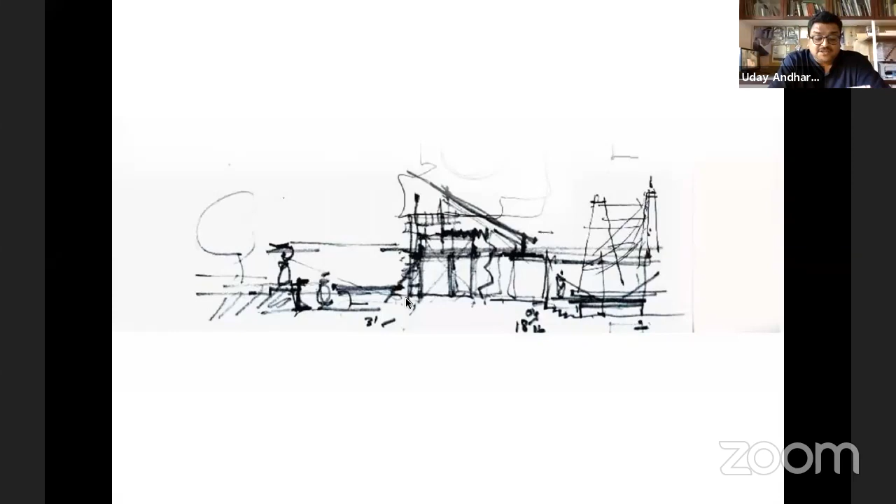What we have seen and admired about their work was the quality of non-performance, whether it was teaching or building. We were influenced deeply by their reticent, silent works that happened around us and spoke of processes and struggles and small, sure achievements as well as their failures. For us, it was a honing, not merely intellectual, but embodied the phenomenological aspects of architecture anchored in its sensorial dimension. It dawned on us early that there is a difference between sense, vision, and image.

Rigor of thought was always paired with the process of acting upon an idea. It was not important as much to arrive at a solution at the outset, but the journey which defined the imminent outcome. The lag between process and outcome was cherished. The outcome celebrated, while at the same time relegated to a work in progress, a never ending continuum.

Academic interactions through evolving teaching methods over the years and the influence of students and peers continue to contribute to thought. I deeply admire the work of fellow architects and engineers today who passionately engage with new alternatives using earth, innovative masonry techniques, use of bamboo, and even efficient systems that explore the potential of steel, developing an amazing body of shared open knowledge.

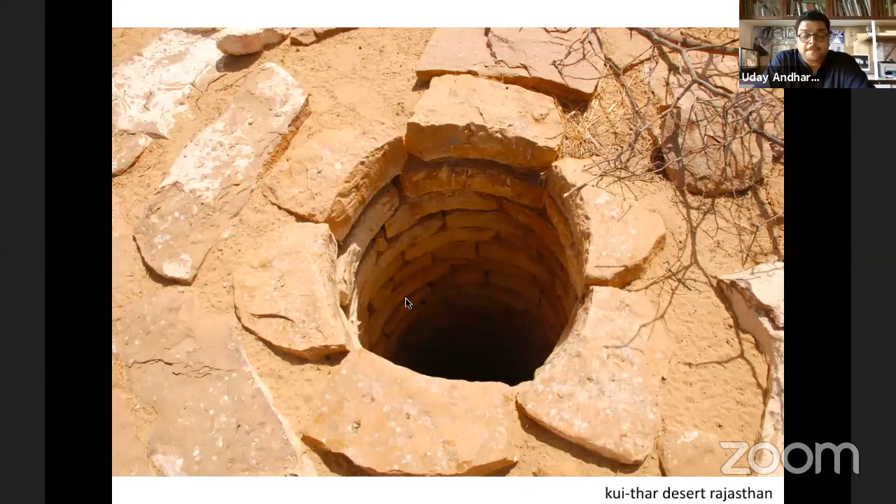A deeper knowledge of water and its structures could not be understood without the understanding of context, society, materiality, and the craft of building. The idea of conservation of water through its ingenious methods seen in kunds, baolis, cisterns, and wells was essential. Our interest in the study of stone and lime in construction exposed us to live practices of using lime in contemporary construction for its incredible resilience, affordability, and thermal comfort.

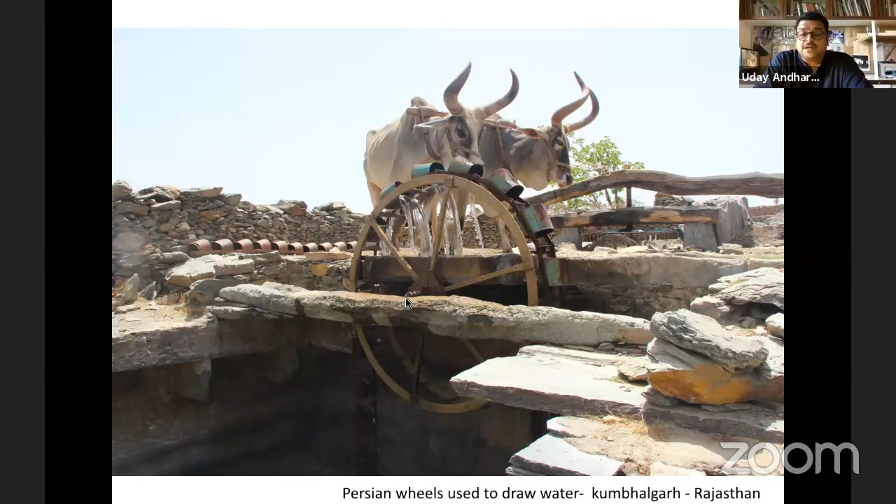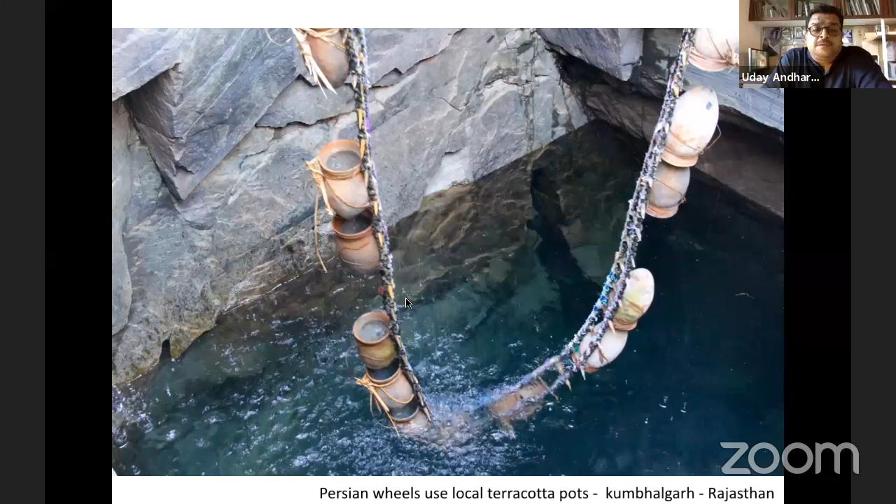What I've been showing you in a series are examples from the Thar Desert, examples of wells that have remained perennial in conditions which have been very harsh and with great scarcity of water, which help us orient our understanding to some of the deeper practices that are prevalent and what they mean today.

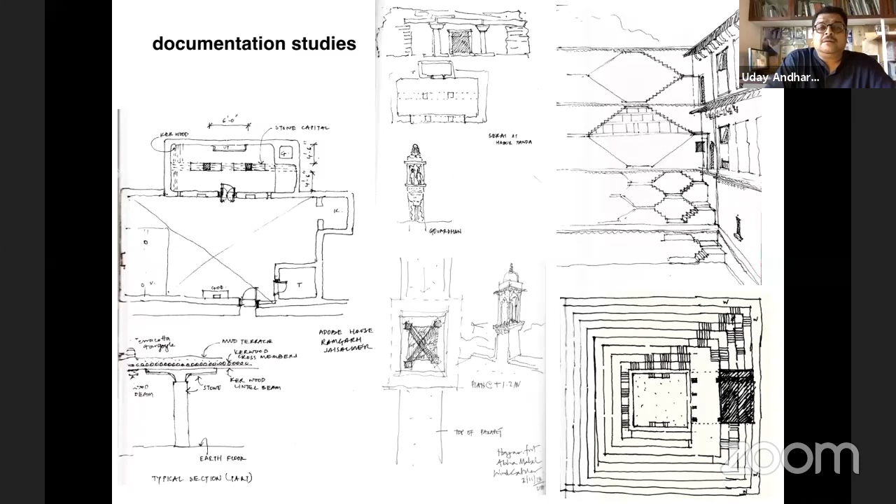A lot of our work has also been through travels and understanding and documenting the things that we see through sketches and through some of the mechanisms by which these things become possible. Of course, looking at architecture by drawing is a very, very important tool, which a lot of the previous speakers on this forum have emphasized, and I cannot stress the importance of that further.

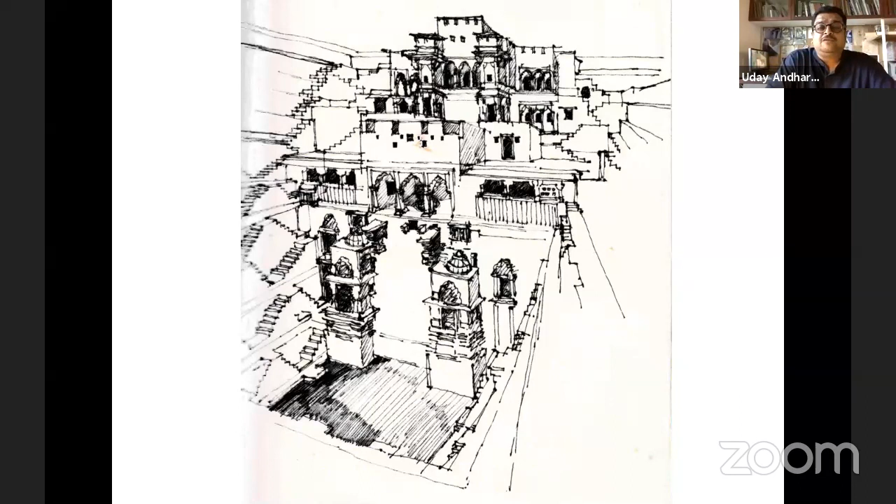The discovery of new forms that connect with water and are related to water and become water-centric in their making is a very, very important lesson for us as architects. Of course, there are known examples of formal architecture connected with water and their integration into the urban fabric as we see today, which is also extremely important.

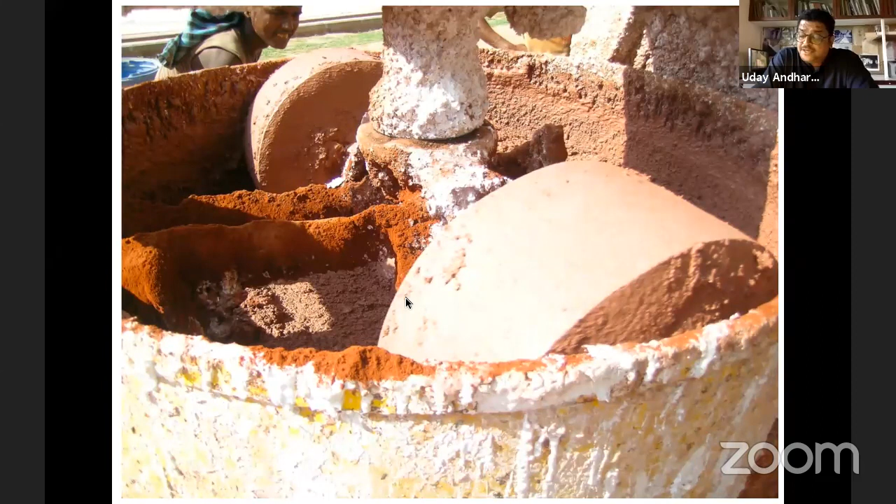Its breathability makes it a living membrane that connects the structure with the natural order of exchange, enhancing the quality of the environment within, self-healing the surface, and ensuring durability. Its forgiving nature during construction is a virtue that affords time to be creative.

Small privately owned lime quarries and kilns that have survived the onslaught of cement companies continue to provide an alternative to the locals over cement. The practices of hot lime mortar and plaster being used today are an absolute delight, and we have been able to tap into these resources directly to support the use of lime that we do in cities.

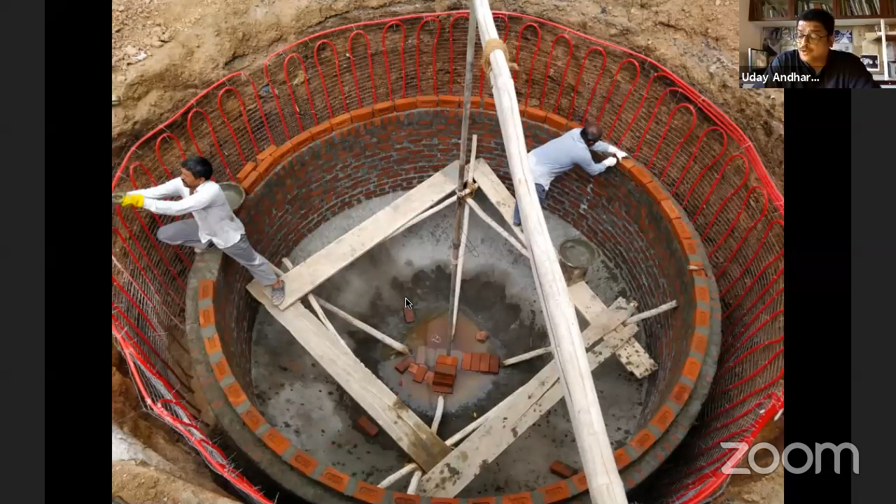Recycled surkhi and lime bricks coupled with hot lime mortars and plasters have proved to be an excellent combination for load-bearing and confined masonry systems that we deploy at various scales of building. Skilled craftspersons are employed on projects to train teams of local masons who have never worked with lime before, to a great success. A big part of our role has also been to facilitate this exchange, marrying appropriate materials and construction techniques with the available practices around us.

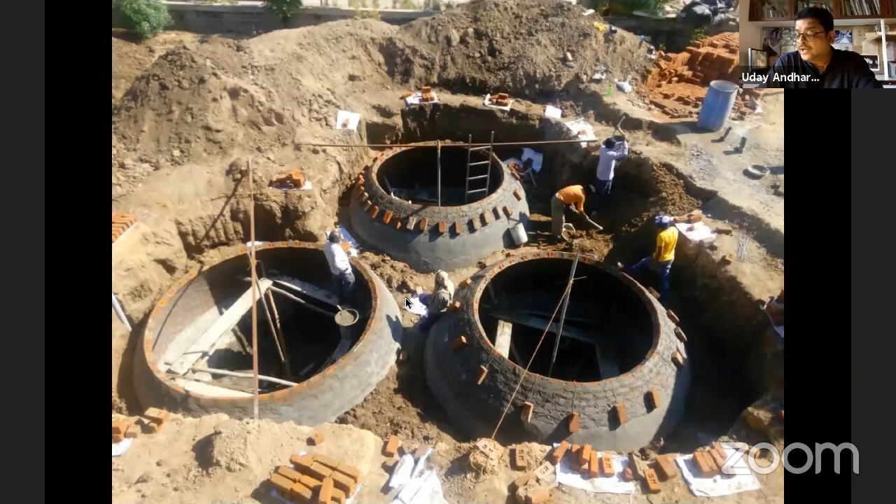Vernacular traditions embed best practices to use minimal resources to build. We have learned from local plaster masons and well makers like Kalubai Sosa from Lok Mitra Sanstha in Saurashtra and Jayantibai Prajapati in Ahmedabad, who build very economical cylindrical masonry tanks for local farmers. These methods have been mainstreamed into our work with critical engineering inputs from us to develop a model for structure cooling and rainwater consumption simultaneously.

These are some of the examples from the projects that we've completed, where a team of masons comes along with 2 or 3 helpers, and we engage our team of masons to transfer that knowledge, with an intent that this knowledge will grow and become accessible to everybody. The whole challenge and the deterrent against people building harvesting tanks is the cost per liter, which was set up by the plastic tank, Sintex and other companies, plastic tanks being priced by the liter and affecting the whole market about the cost. But these are very economical to build.

And of the 4 examples you see on the screen, the first one, in Suramya House, is the one we built in our own home. The second one is in Adipur House, which uses the idea of radiant cooling and creating the tank as a thermal mass. The one on the right is the Natarani Amphitheater stage, which actually holds a 1 lakh liter tank below its performance stage.

And the one in the center is a very complex structure that we are working on currently for an Upashraya, which uses a stored system 2 levels below the basement and an access draw well, and the entire structure is built out of hydraulic lime and brick. This is a project which is still being worked upon, but these are detailed drawings that were made to understand what we try to achieve.

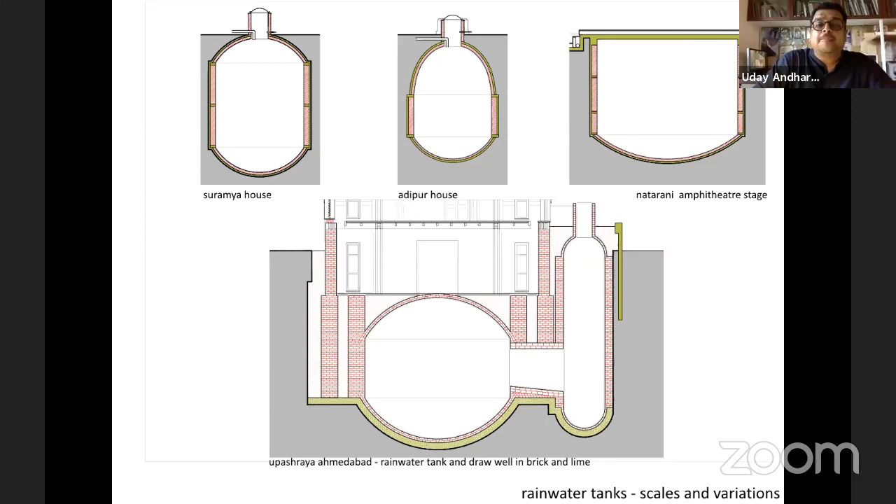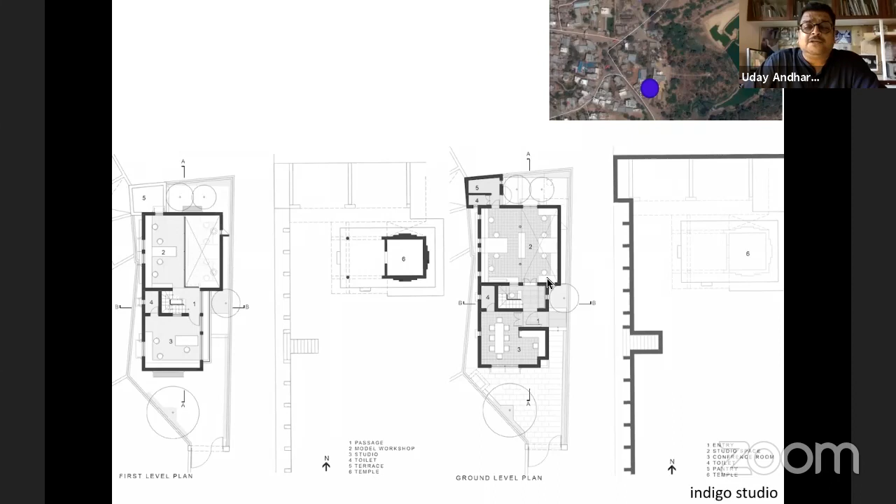The everyday is important to us. This is the photograph, this is the plan of our studio. That's the lower level and this is the upper level. And we sit right on the edge of Shilaj Lake. This was built in 2010 and it engages our building and its sense with the temple plinth, and creates an introverted environment, which actually ended up being our lab along with our home.

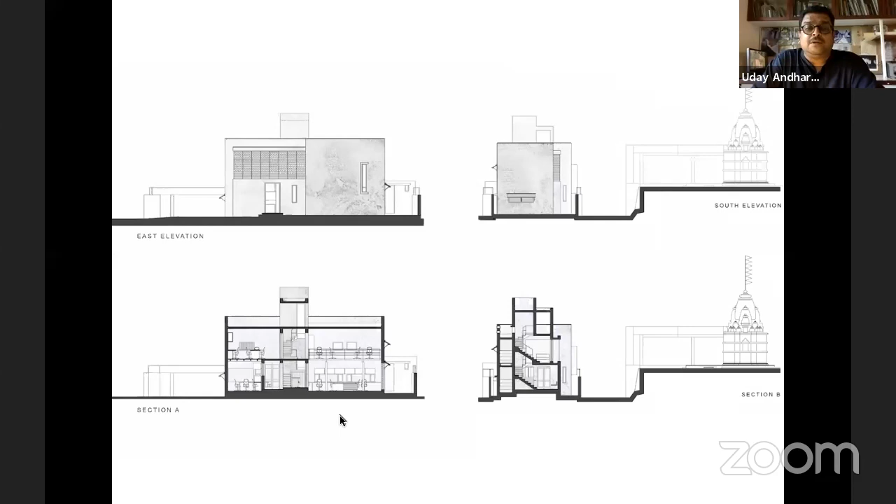Our home was built on the outskirts of Western Ahmedabad soon after the earthquake in 2001. This is also an important lab for us. So in this plan, we have an L-shaped plot of land, and there is a dwelling here and another part here. This is the part which we built first, where our parents moved, and then this part was built later, and then there is a beautiful connection that happens across the court between the two units.

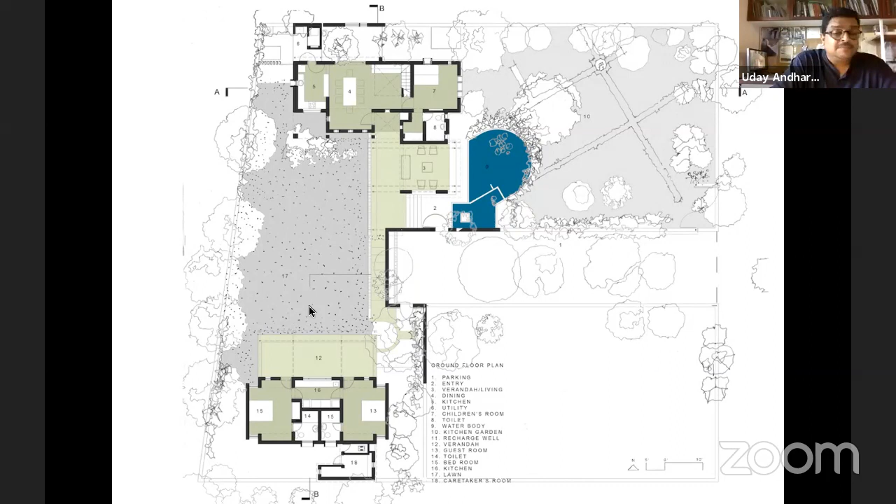Like I said earlier, the everyday is important. And experiments in structure cooling, use for rainwater, layered screening, and natural shading strategies, along with the use of lime in construction for the first time, happened at our studio. Upcycled furniture and everything that is salvaged was incorporated in both our home and studio. These are some of the sections that explain to you the nature of the built form and its relationship with the landscape.

The garden where we grow our food, make compost, harvest rainwater to drink, conserve and recycle the seeds we save and share, and the food we cook, virtually living outdoors, forms the core of many lived experiences. Edible screens, vegetable, and other vines are used to shade and transform space in summer to increase its usability.

These are the things we grow within our purview of everyday life, spending almost an hour and a little more every day to ensure that there is a certain amount of food that is grown to offset the stuff that we need to buy from outside. We've worked with various strategies to elegantly bring water down from the roof so that it can be harvested. And there is a certain joy in the assemblage of things. We try to assemble these things together. They may be clumsy contraptions sometimes, but they get refined over time.

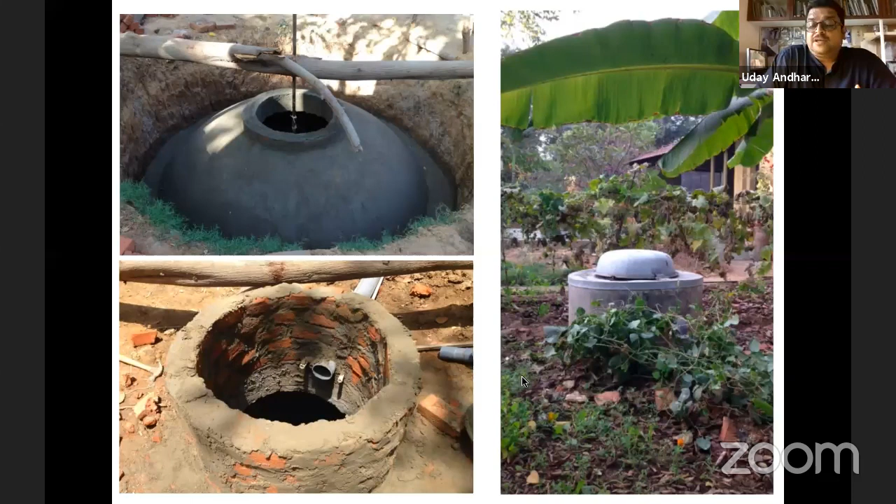And this is another tank we built. The first one we built below ground, the cylinder which I had shown, and how it gets integrated within the garden. The earth over the tank actually becomes the great insulator, keeping the water temperature inside the tank to a very comfortable 27 degrees. You allow nature to take over the building. You allow plants that will give you food to engage and come into your life so that their existence and yours becomes one and a very merged experience.

And there is a lot of learning in the way we see this. We have grown various kinds of vegetables and creepers and pumpkins and brinjals and other things together with rose vines. And we've discovered that they work with a certain synergy and take care of each other. And I think that's a very beautiful way to look at domestic landscape, in a way that it becomes integrated and synergistic with what our needs are and defines the interdependencies that we have with these systems.

We also have experienced heat from the roof, and these are experiments where we buy hay from the local fields, tell them to store it on our roof, and eventually, when the summer is almost coming to an end, we give this back to the person from whom this was taken, and by monsoon, the roof is clean, washed, and ready to harvest water. So this gives us a very interesting connect with the local agrarian cycles.

So every time there is a crop outside that's harvested, we get the hay. The hay comes to our roof. We keep it there for 3 to 4 months, and then afterwards it goes away. So it kind of reinforces our belief that if we can afford to connect ourselves with what is around, then I think that can be very enriching.

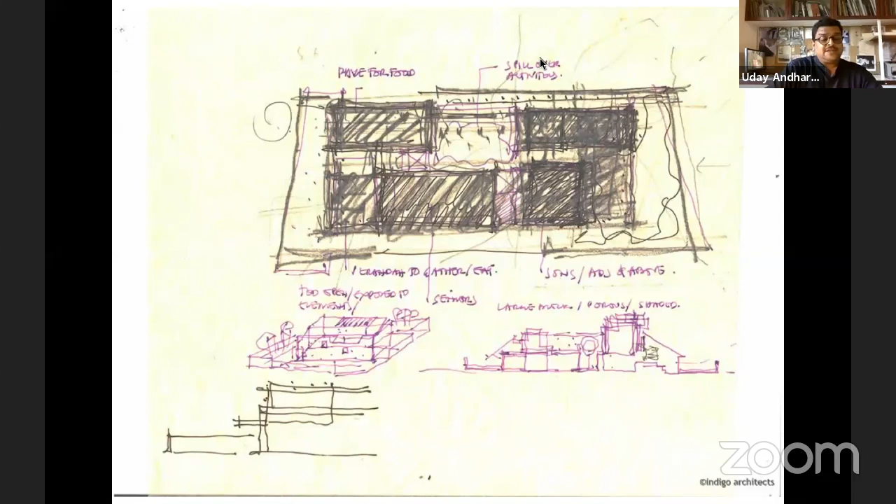We generally design around 5 aspects: the client and programmatic needs, the site, available resources of material, water, thermal comfort, and building resilience. Listening keenly to clients builds a rapport to realize the objective in a fair and considered manner, to establish a dialogue with stakeholders, to raise new questions and opportunities to enrich and clarify the program. Participatory, inclusive processes of interaction irrespective of the scale of the project.

This is a plan of a house we completed recently before the lockdown in a city called Adipur near Gandhidham in Kutch. And the family approached us soon after the completion of the LLDC museum in Kutch. They happened to see the museum and experience its environment and the manner in which it was put together, and called us and asked us if the same kinds of systems, principles, materials, and ideas can be integrated in a dwelling with a limited budget.

So we thought it was an interesting idea to engage in a conversation with them. And so we took upon the request to go and meet them. So this house basically started with that as the backdrop. So this is a plan for a family. It's a joint family. They are farmers. They are connected with the dairy business and extremely enthusiastic and aware of what the environmental ramifications are of building in a certain way.

Adipur has seen some really terrible works happening post-earthquake, along with some good ones as well. But there is a certain discordant note that the buildings around there strike, whether it concerns earthquake resilience or climate. There is a lot of money being spent on crazy finishes because Kandla port is actually the conduit for exports, and a lot of people are aware of what the West is using, and they grab all the things that are going out of the country as being appropriate and begin using those in the houses around. So they attempt to sort of make a house in line.

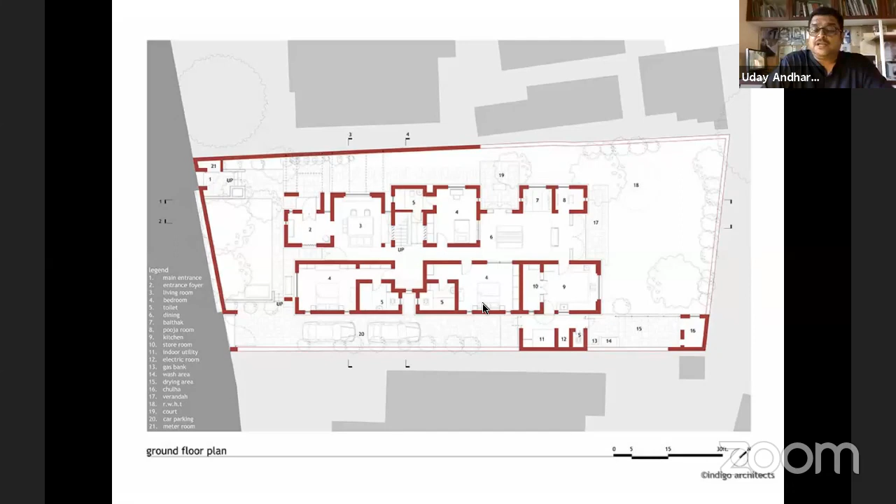The clients wanted a house in line, and so we agreed and we engaged in this fantastic dialogue with them to realize the plan. And this was the nature of engagement that happened almost on a fortnightly basis. The entire family was involved in the discussions, the plan, their own requirements, and we found a very interesting voice amongst the women of the family who took the lead in determining what is appropriate, what is not, what falls within the range of their daily ambit of work.

And for us, it was a great learning experience to begin to tune into this process and come up with a building which is absolutely dovetailed to every nuanced requirement of the family. So here, what we experienced was a fantastic engagement across.

And then when the project was getting done, there were a lot of inputs that came from them to tweak things, and those were managed within the framework of what we had proposed, looking at the use of lime, surki, bricks, lime mortar, lime plaster, and all the works that go into a normal project that we do.

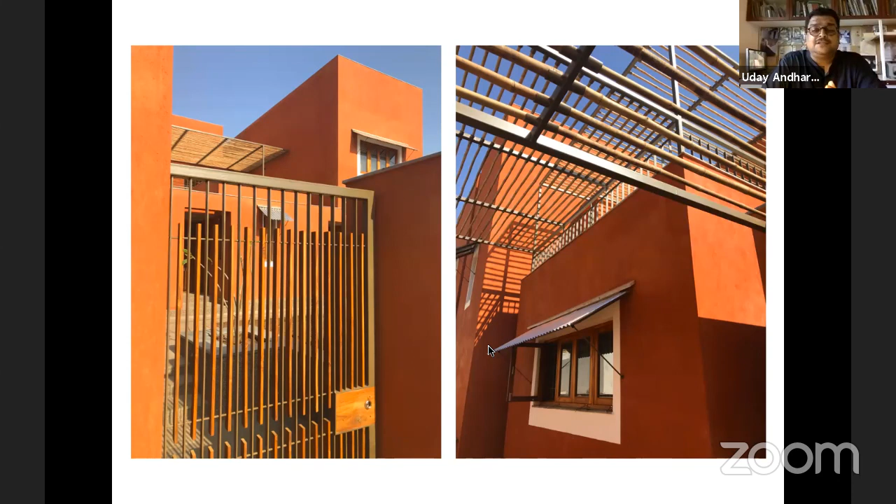What was interesting in this was the manner in which the building sits in the neighborhood. A lot of buildings around are plastered cement structures, and here comes this red brick structure. And during the course of the year that the construction happened, the building also ended up becoming familiar to a lot of people in the neighborhood. And a lot of people would walk in and see and understand what we're doing.

And this building actually embodies every principle of thermal comfort that we know, both in the book and through our experience, whether it is the use of lime, the managing of shared service spaces that create buffers, cross ventilation, thermal draining, rainwater harvesting, using the rainwater to cool the building.

And in this particular building, there was a very interesting process where we engaged with the tank makers from Saurashtra and put them in touch with a company that does radiant cooling. And we detailed out a system where the radiant cooling system and the traditional masons who make the tanks talk to each other. And we engineered a very efficient system for creating thermal comfort.

Post occupancy, we've been there at the opening and then subsequently, and we find that the envisaged spaces are used in the way that they were meant to be. And we go back to our idea of how much light is enough within a building and how dark can spaces be and what is the nature of light that comes in, and cross ventilation and reflectivity using dolomite plasters within the house and how it enhances the sense of comfort within.

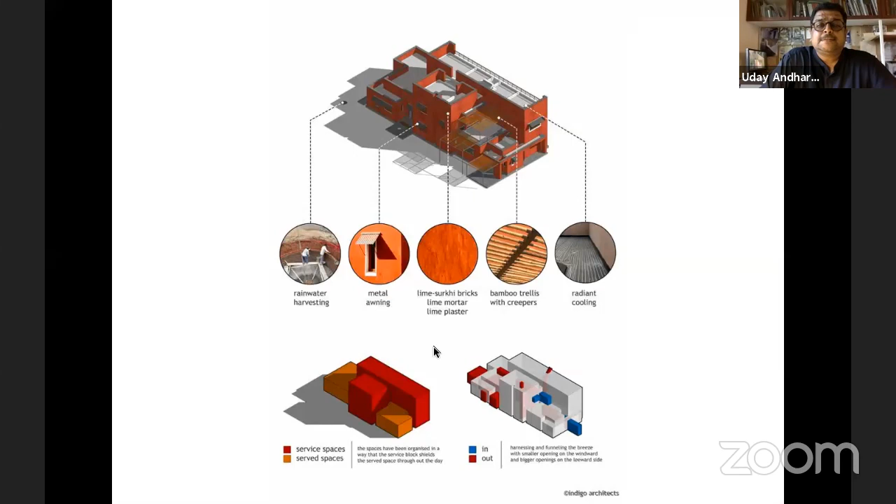So I come back to the physical aspects of building and construction, where we try to keep the building from heating up, so the need to cool the interior is minimized. We use materials that don't heat up and are durable, such as lime in masonry, mortars, and plasters, and devise systems that drain the heat from the roof and other surfaces.

Here, I would like to talk about two things. One, that we've always learned since we were students that it is important to insulate. But insulation is a delay mechanism, and it does not actively rid the building of its heat. So one of the things that we learned from a very senior engineer in India, Surendra Shah, who has worked on several of our projects and guided us, was the need to keep the structure cool. So this has become a very important consideration in the design process.

And these are cornerstones because there is no way we can escape these. And there is no way that we can continue to afford to make buildings the way we do. So given the situation that contemporary practice happens to engage itself in, these systems to us are absolutely essential.

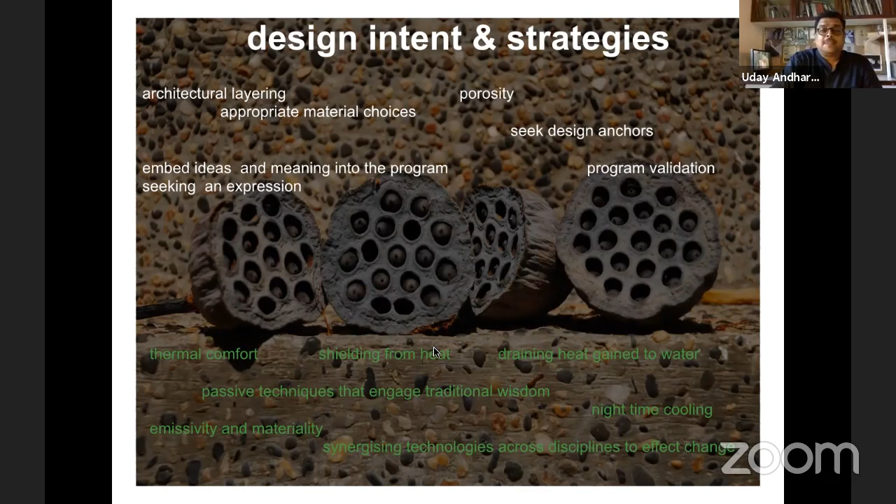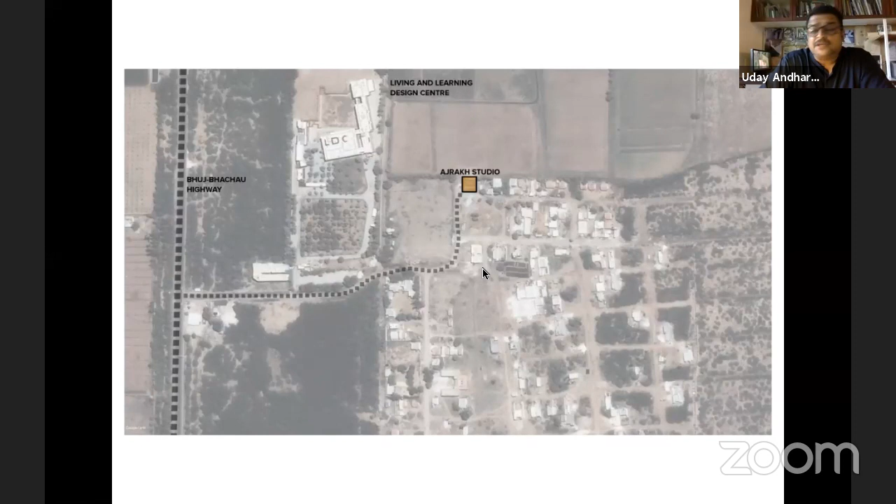I will now share vignettes of three projects, two projects from this point, the Ajrakh Studio and the Natani Theatre, quickly. So the Ajrakh Studio is right next to the LLDC museum. This is Ajrakpur village, which was formed soon after the earthquake. And this site was part of open barren land where the LLDC eventually came about. So after we finished the LLDC project, the master craftsperson Ismail Bhai Khatri, Dr. Ismail Khatri, wanted a small studio space for himself to work on.

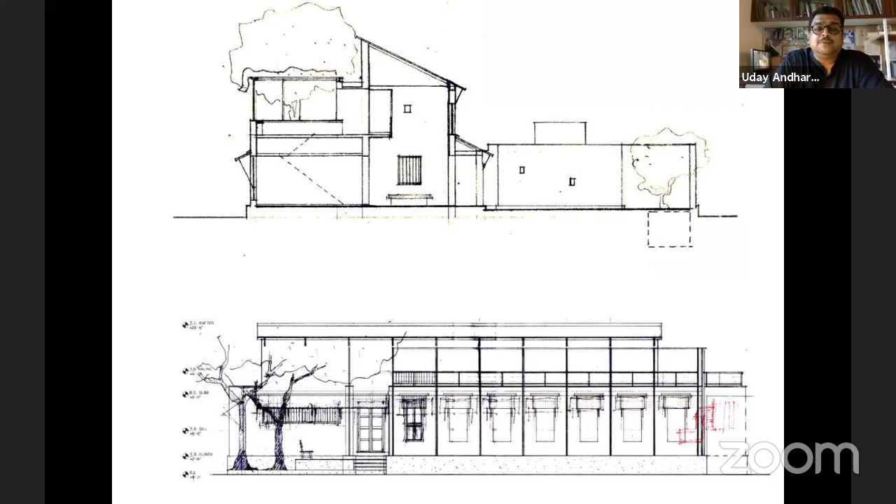And we started working with his program and certain basic ideas of what an insert in this kind of a neighborhood would mean, and what the main master craftsman of the community wishing to have a studio of his own would mean to the rest of the community. So there were these questions that emerged. We had a fantastic dialogue with him. And then there were certain components to his requirement on a corner plot right next to his house.

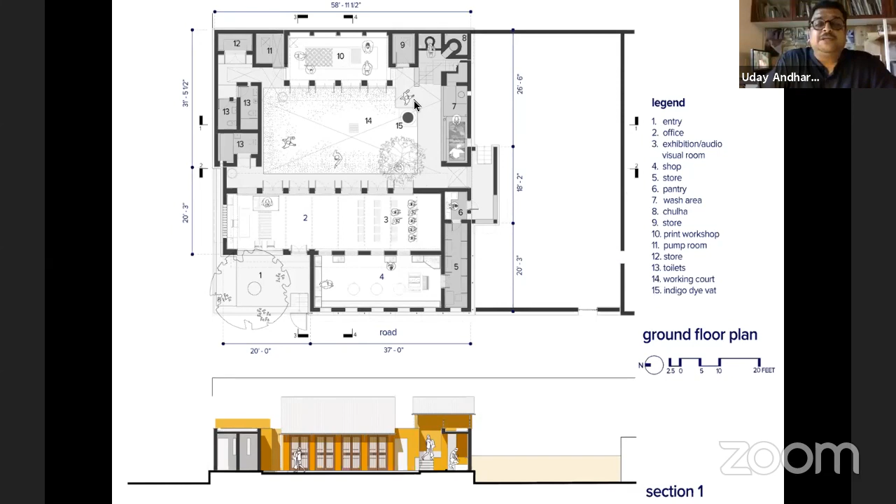So we took this simple requirement and began looking at craft, its spatial configuration, the need for porosity so that there is an exchange between the two volumes and the workspaces. Thermal comfort was essential because we're in Kutch and this is a very, very harsh environment. And in that, of course, our selfish motive of seeking expression and identifying place.

And I think this project also taught us a lot of things where, again, the client desperately wanted us to use the things that happened in LLDC because they had seen the advantages of that. And here, at a very small scale, all the materiality, all the principles that I discussed about the previous project were done here.

In fact, this project was completed 3 years back, and a lot of the clients who gave us the Adipur house to do kept visiting this place over the summer to understand how the structure cooling works, whether the floor is actually cool or not during the summer. And only once they were satisfied did they ask us to move forward. So there was a certain test that this building has also gone through.

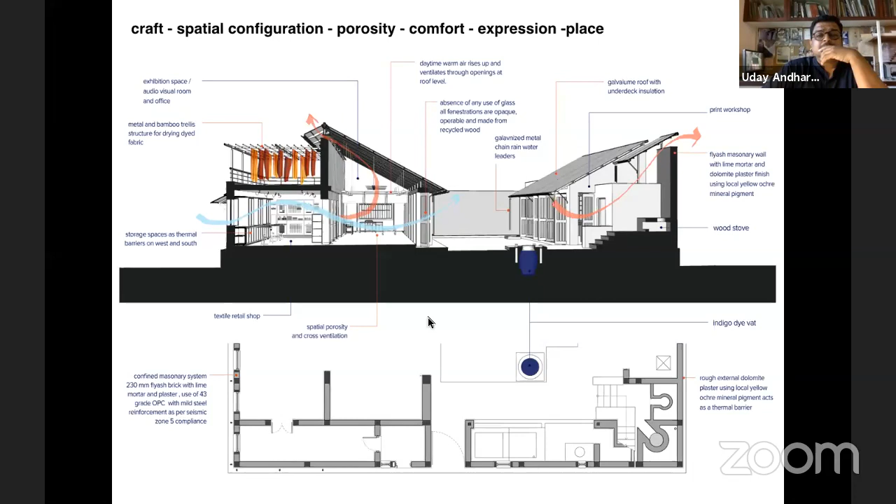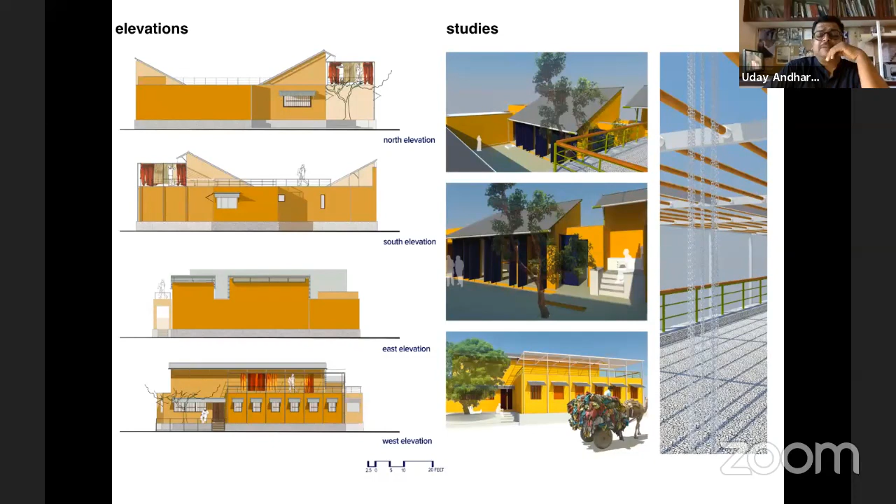So that's one of the completed images taken a few months back, where the manner in which it sits. We are currently working on the extension of this and the residence for Dr. Ismail Khatri in this space, almost preempting that this would eventually happen. So the wall and the gate is in place. The neem tree is in place, and we are going to be working within this area soon.

And this is the sense of the structure after it was completed. It's a small clip which will give you an idea of how the building sits in the context. What you see beyond is his current residence and office. And then there are these barren streets on which there are small tenements that people have built for themselves.

This is the sense of space within the courtyard, where there is an indigo dye vat here. And these are the tanks where they wash, and then there are two tanks here which are meant for rinsing the fabric. And here what you have is the print shop. And this is the chulha where all the material is boiled for the process.

This is the space where he entertains his visitors. There are a lot of people who come from abroad, designers and students from fashion institutes and other places who want to learn the craft. And so this is the place where he engages with them, and the courtyard is the place where they hold workshops. And at the far end is the space where he sits.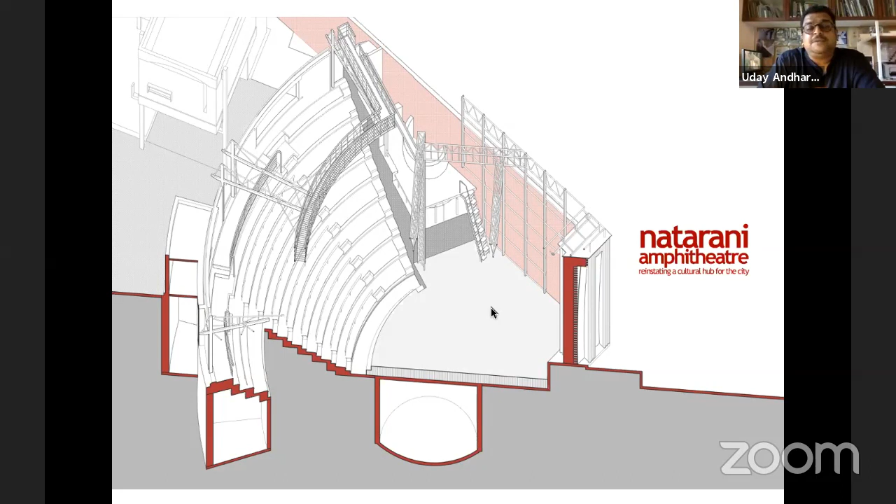The last project which I would talk about today is the Natarani Amphitheatre, which we finished in 2018 and was part of a fantastic journey with engaging with a piece of land laden with history.

So I'm sorry, I'm out of electricity, but it should be okay.

So this site is on the edge of the Sabarmati riverfront. This entire precinct that you see here is the home of the Sarabhai family. This is the building Chidambaram, built by Gira Sarabhai way back. And over here, so this is the family home. And over here is the Darpana Academy for Performing Arts, whose early buildings were built way back in 1963.

The earliest building that was built there was a small library that sat on the edge of the river. And this was initiated by Mrinalini Sarabhai. And the library also worked like a multi-purpose hall where dance could be taught and there were certain resources. In 1966, they purchased a temple and put a temple structure. It's like an old Haveli temple, which came up here.

And later, Achyut Kanvinde, who was involved with the PRL and also very close to Dr. Vikram Sarabhai, was called in to design the Darpana Academy for Performing Arts. And his intervention here straddled the space between Doshi's library and the temple and occupied the space here.

Subsequently, Kirti Shah, architect from Ahmedabad, engaged by Mallika Sarabhai, was asked to develop the amphitheater, which is shown here, which sat along the contour going down to the water. So these were incremental growths that happened over time. And by 1999, the Natarani Cafe came into existence, which defined the edge along the city side. So this is the river side, and that is the city side, the structures.

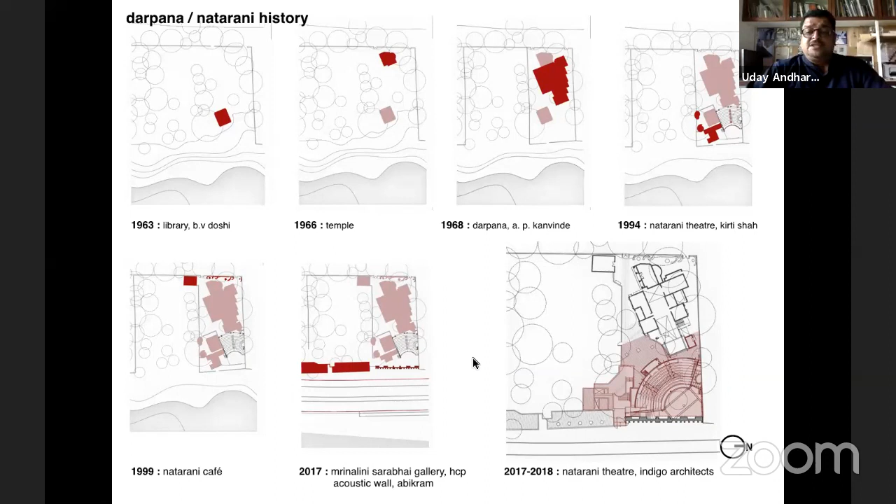During that process, we were asked to make a proposal for the new Natarani Theatre. And while we were asking questions about how one would intervene here and the proximity of the Kanvinde building right there, our studies actually were instrumental in also making all of us become aware of what would happen here eventually when the expansion happens. So with that backdrop, this is the moment when we entered the project and looked at what was going on. And then this wall was kind of under construction at that time.

And this wall was meant to rise up and block the entire connection with the river in order to cut out sound. And it was a massive wall. It was about 1.5 meters thick and almost about 13 to 14 meters tall, and ran about 30 meters. And there were a lot of experiments being done about what the wall should be, how its acoustics would enhance the space. And so at the end of the day, while these experiments were going on, we were also looking at the container that was holding the steps.

And these steps were actually built on an earthen mound with Kota stone on top, and served as a fantastic outdoor venue for the people of Ahmedabad to enjoy crafts and the craft of dance, music, and interactions with intellectuals. And it was a fantastic fertile ground for all kinds of activities. This is where you see the profile of the building by Doshi, which was part integrated with the retaining structure. And unfortunately, this building was in a very, very poor state of repair.

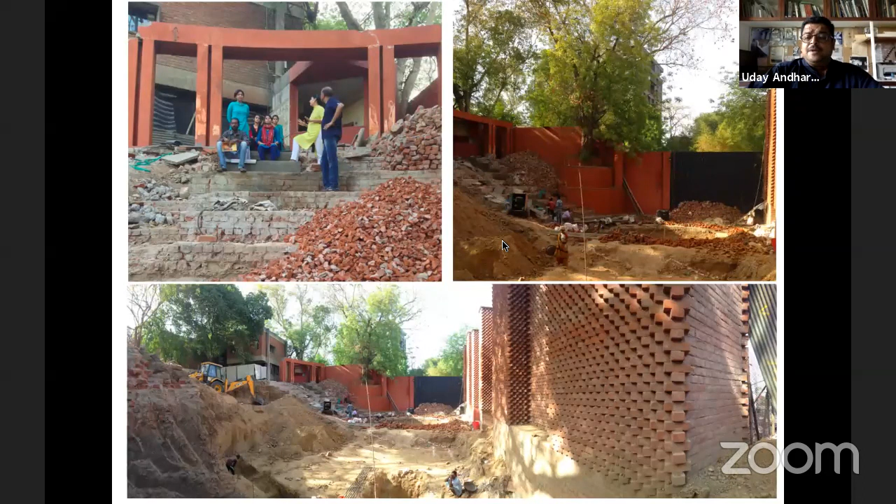And after great attempts to look at what can be done with it, the clients decided that there were a lot of issues with the adjacent structures, and that their programmatic requirement to expand meant that we had to sensitively look at what would stay and what would not. And in that process, the old wall, which was defining the dance school, which was built in 1994, had to go because it had serious cracks. And there was a lot of water seeping into the steps, which was deteriorating the structure beneath the library. So it was decided that we have to remove all this in order to accommodate the new program.

But one of the things that we suggested and involved the clients with was that we would recycle the rubble. We would take all the old bricks, pulverize them, and make new Surkhi and lime bricks, and use all of this material by grinding it in with lime and sand and other additives to facilitate everything from the foundations all the way ground up. So that became a fantastic exercise to salvage everything that came out from the old structures, including the known structures that were around, including the steps. And we started to work along those lines.

During that time, we also proposed to them that since we have an open amphitheater, which is going to get a lot of rain, we open up the stage and create a huge harvesting tank under the stage so that we can create a massive water reservoir. The fundamental idea was that if you have a water reservoir beneath the stage, then you can use that water as a thermal mass to cool the structure. So the idea of structure cooling got integrated into the design at the outset.

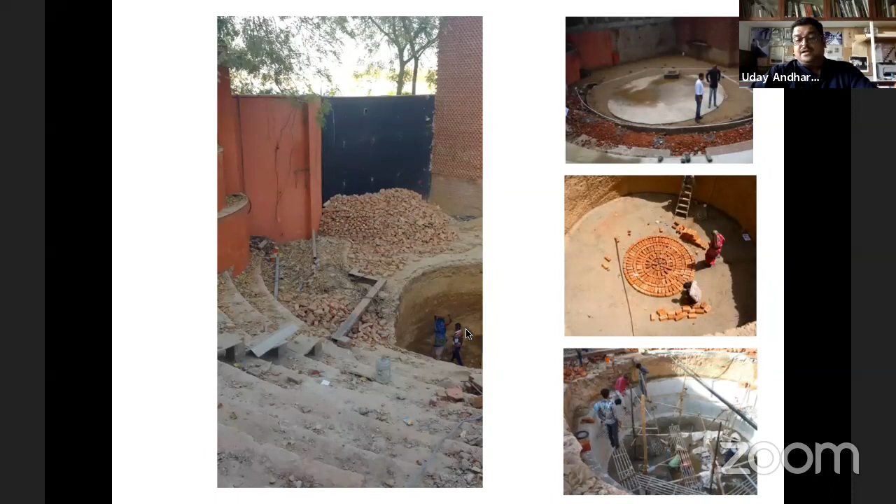And we started working with the tank that I showed you earlier in one of the images. At that time, the wall had been completed, but its integration with the larger idea was still not in place. So we took that opportunity to start connecting all the structures that were our neighbors into the fold and the design ideas of the new structure. So to your right, you see the manner in which the tank was.

Hello? Yes, sir. We can hear you. Yeah, are you able to hear me? Yes, sir. Yeah, we had a power outage. Yes. Just trying to get my act together. Okay. Just a second. Are you able to see the screen? Not yet. Okay, hold on. Are you able to see it now? Yes, sir. Okay, I'll just continue.

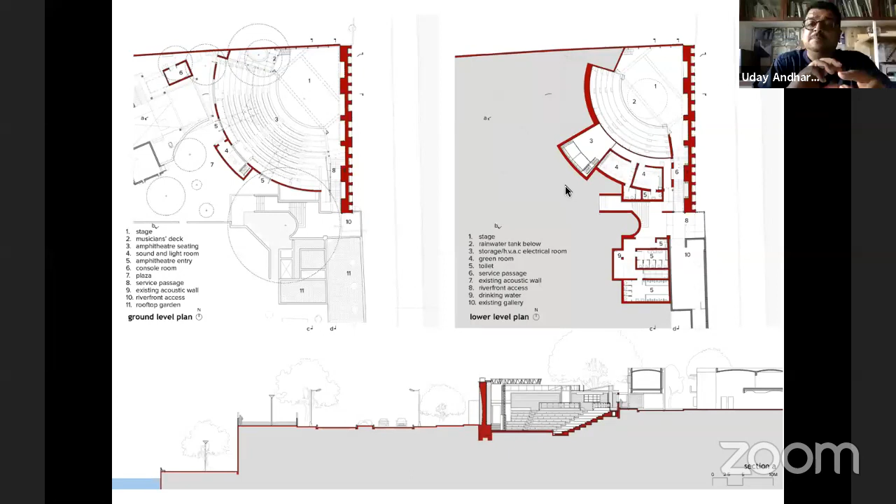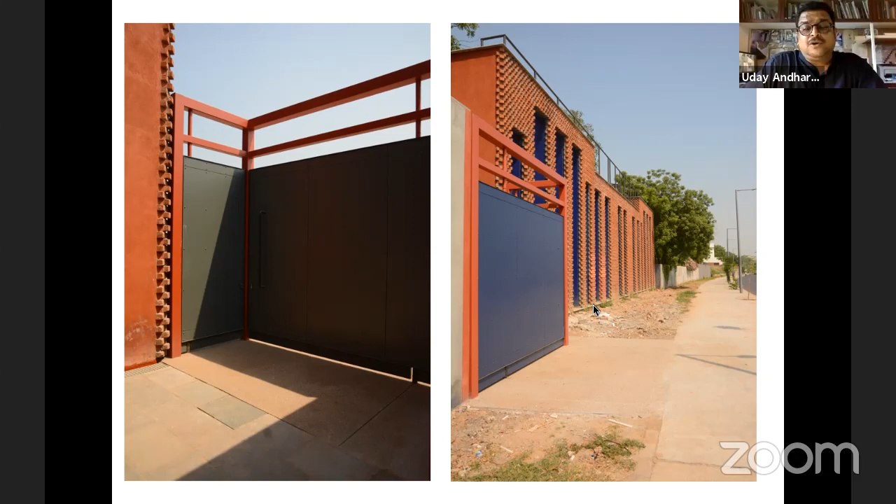that we've enjoyed so much. And then in doing that, we occupied the top of the gallery done by HCP to define the surface above. These are their air vents and their light ports. And so we propose that there should be a green thermal mass over this to improve their thermal efficiency. And at the same time, create a very interesting upper level foreground from where one can experience the river and the ensemble of the Natarani Theatre.

So this is our little intervention here. This was how the occupation of this wall becomes meaningful. And this is the edge defined by the Mrinalini Sarabhai and Dr. Vikram Sarabhai galleries as retaining walls. And this is the sense that one gets of the project from looking towards the river at night. And the last thing would be a little 1-minute clip, which I would like to share with you before I end tonight's presentation.